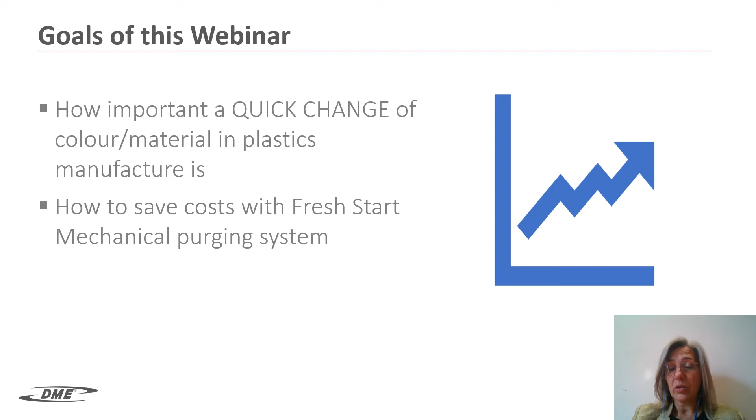The goal of this webinar is to understand how important a quick change of color or material is in plastics manufacturing, and how we can save cost while doing these changes, because we're going to do them quickly and efficiently.

First, let me introduce DME. DME belongs to Hillenbrand, which is a main company with a 2.9 billion turnover. Within Hillenbrand there are several companies focused on plastic processing: DME, Milacron, Mold-Masters, and Coperion.

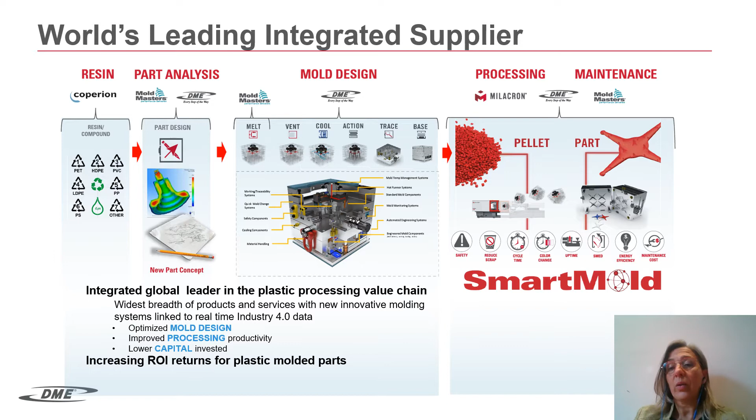DME's aim is to be your partner in the injection molding process from the very beginning to the very end - from part design and mold design to processing and mold and machine maintenance. We want to help you optimize mold design, improve your processing productivity, with the lowest possible investment.

So why is making quick changes in plastics material or color relevant for you? Some of the reasons are obvious - it's obvious that we want to increase the quality of our process.

Our goal is to grow the business and increase returns, but also if we are more efficient in doing the color or material change, we'll have happier employees - an employee will be happy if they can make a color change in 1 hour or 30 minutes instead of 8 hours.

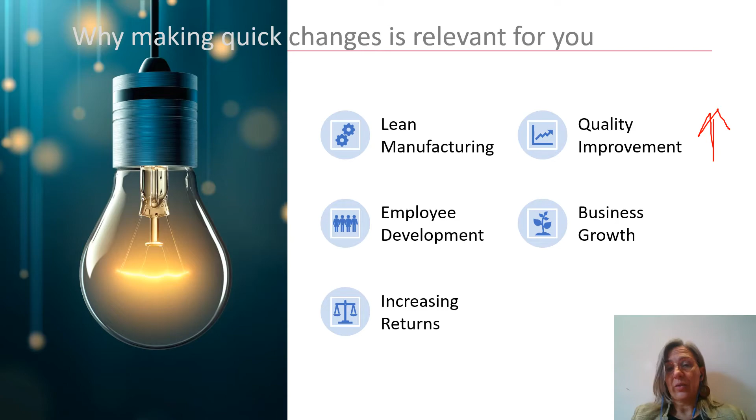Being more effective is also going to help us with initiatives such as lean manufacturing. Why am I mentioning lean manufacturing? Because at the end of the day, which is what a lot of companies are dealing with currently, the goal of lean manufacturing is to eliminate waste and minimize cost.

Also, lean manufacturing is a pull system - you only start new work when there is demand for it. What this means at the end of the day is that your customers are going to ask you for intensive color changes and intensive material changes, because you're going to change your molds very often. So you need a system which helps you do that effectively.

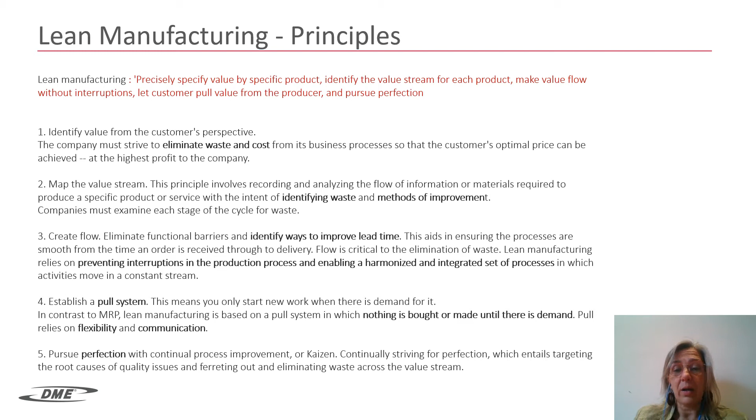Lean manufacturing is also about minimizing the scrap and waste - that's something we want to do. If we can do a color change in 20 minutes instead of 8 hours, this is obviously going to improve our profitability.

So how can we evaluate the suitability of a purge system? The first thing we need to think of is the parameters we need to take into account - which are the relevant metrics I need to consider to evaluate the purge system?

Is it only the material price? No, of course not. We need to take into account all these things - what is really my scrap rate currently?

How does that translate into material loss? What is the cost of reprocessing this scrap that I'm currently generating? How much extra labor does that imply? And what is the overall cost of it all?

So this is all we need to take into account - it's not only a couple of prices and that's it. We'll see a little bit more of that afterwards.

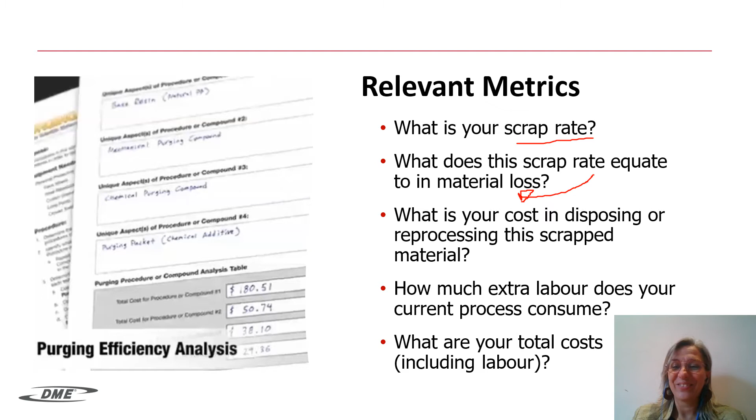Let's start with a very basic example. Let's consider that I do a changeover using virgin resin. This changeover is going to take 2 hours for me. The machine running cost per hour is 80 euros, so the machine downtime cost is going to be 160 euros.

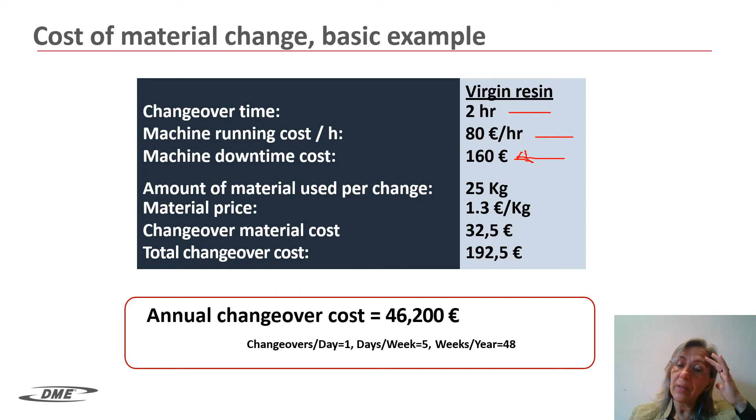I'm using 25 kilograms of virgin resin at a price of 1.3, so the total material cost I'm wasting here is 32.5 euros. The total cost of this changeover is 192 euros, which means I have an annual changeover cost of 46K. We need to keep that in mind, and we'll use it afterwards.

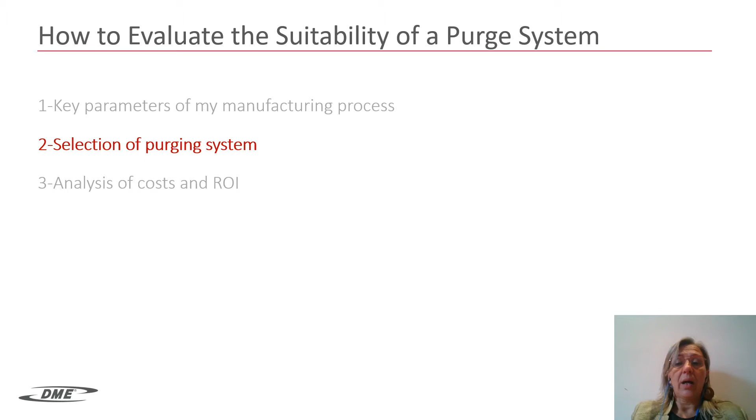So the next thing we want to do, now that we have an idea about the cost that it might imply in my company, the current purging system, we want to decide which purging system we want to go for. Some common situations I already faced is that when you talk to customers, they say, oh, I have a homemade purging compound, it's very cheap. I did it. Is it really cheaper?

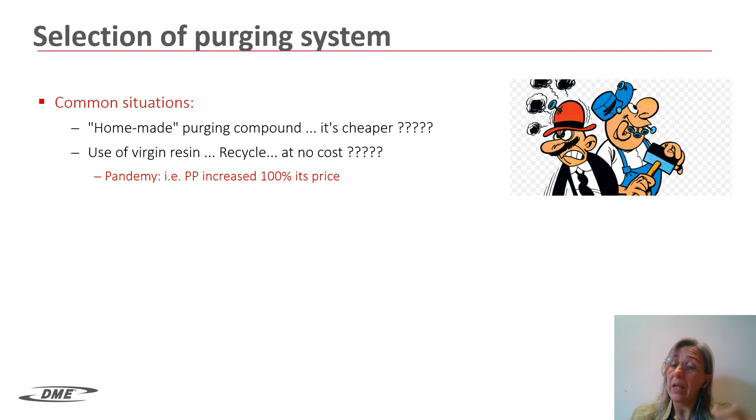I even had a customer who told me they were using corn because of the thermal expansion of the corn. Then some other people may say, no, I'm using virgin resin because afterwards I recycle it and purge with virgin resin. But there are some implications, right?

Are you considering the amount of hours you're currently using, the effectiveness of the transition, the contamination you're getting into the system? For example, if you use virgin resin, because at the end of the day afterwards you are going to recycle this resin. These are things you need to take into account when going for a homemade system.

So the challenge is really to understand your current cost of the internal solution and compare it to our proposal here.

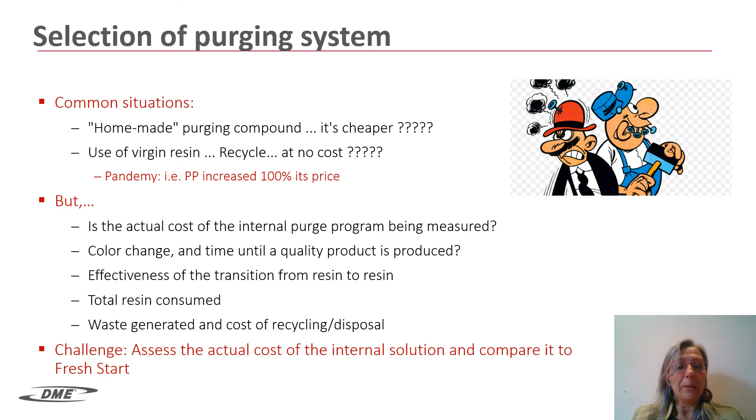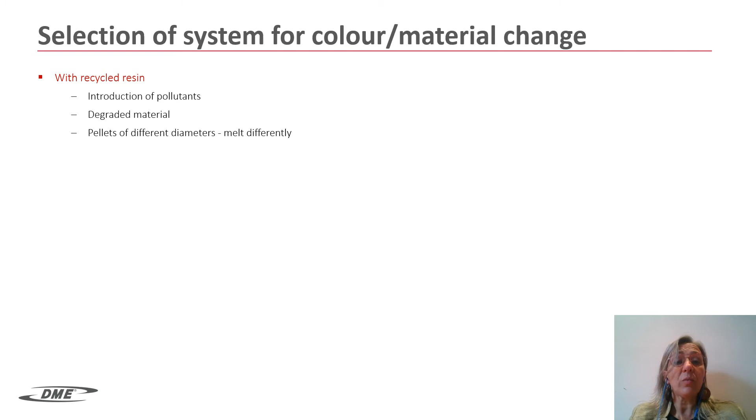Okay, so there are several systems for doing color or material changes. One is using recycled resin. Obviously, if we go for recycled resin, we are introducing pollutants and degraded material, and we have pellets of different diameters so they melt differently, and it takes a long time. The same with virgin resin, it takes a long time as well. So time here could be essential for both solutions.

And none of these materials is obviously designed to remove the sticky items that get in and are making our life difficult when we are purging.

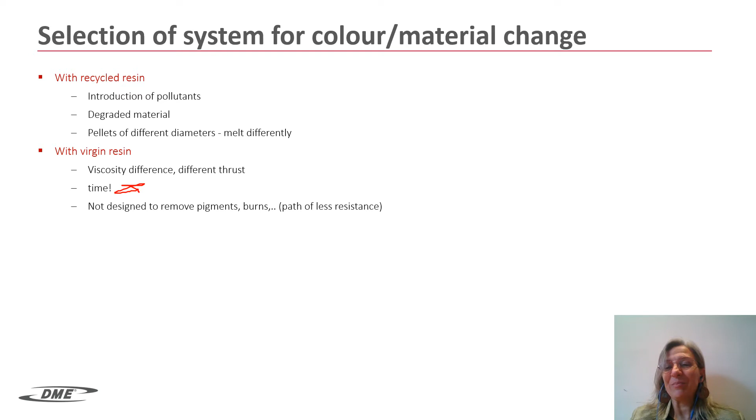So then there are several purging systems: mechanical, chemical, and hybrid. The mechanical purging systems usually add additives, basically it's a plastic with some additives on it, and they usually use more or less abrasive material. That's the first difference with our system, that we are not using abrasive material.

If we go for mechanical purging, there's no chemical reaction needed. The material just gets melted and it cleans, and it doesn't require some activation time, some soaking time. It cleans by shear tension between material and the surface, and this is really nice about that.

Another possibility is to go for chemical systems, and these systems do require activation time. Then there's a mixture of the two, and these are the hybrid systems. So these are the systems we can find, generally speaking.

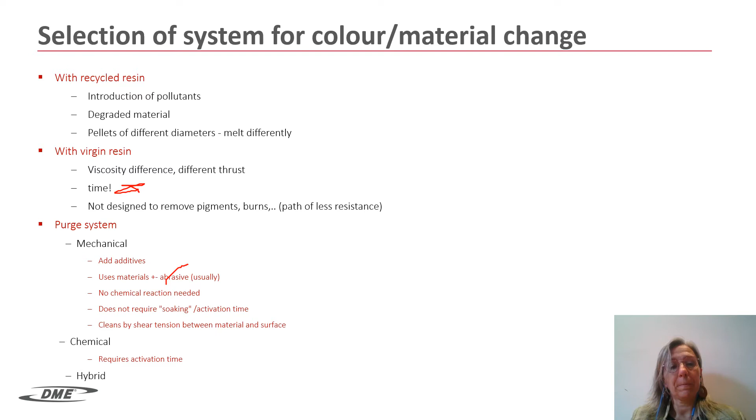So which are the critical areas of difficulty in cleaning? You have suffered that much more than I have, so you know this happens in the machine and in the mold, but it also really depends on the material. Reprocessed materials are more difficult to get rid of, and organic pigments are sometimes a pain to get rid of.

Where do these materials get stuck? Mainly in the barrel wall, in the flights of the screw, and at the very end of the machine.

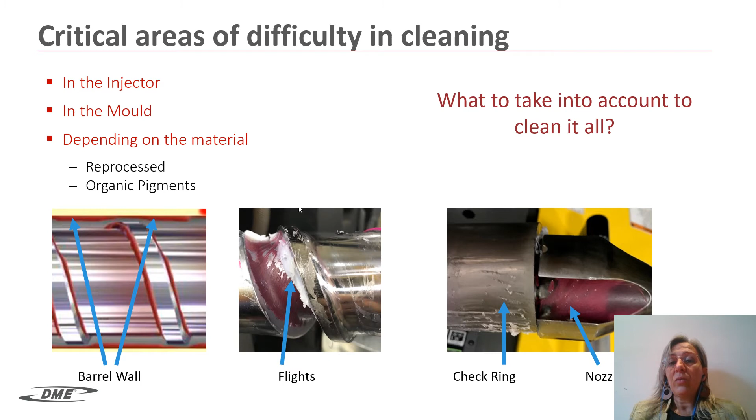What do I need to take into account to clean it all? The first thing we need to know is that the plastic tends to go to the path of least resistance. So it's easier for the molten plastic to flow here than there, because here there's friction with the wall, and here there's just more molten plastic.

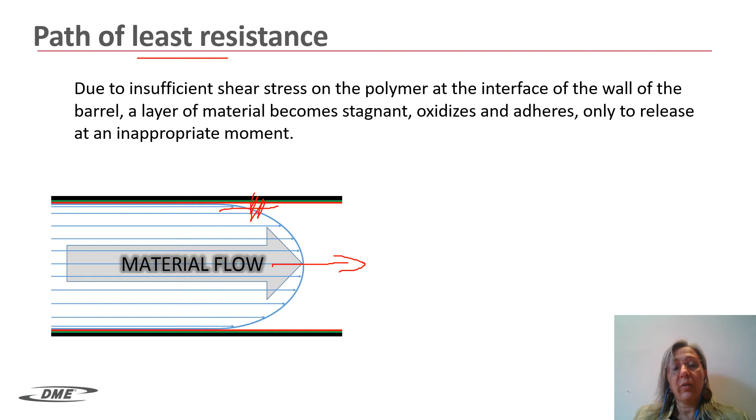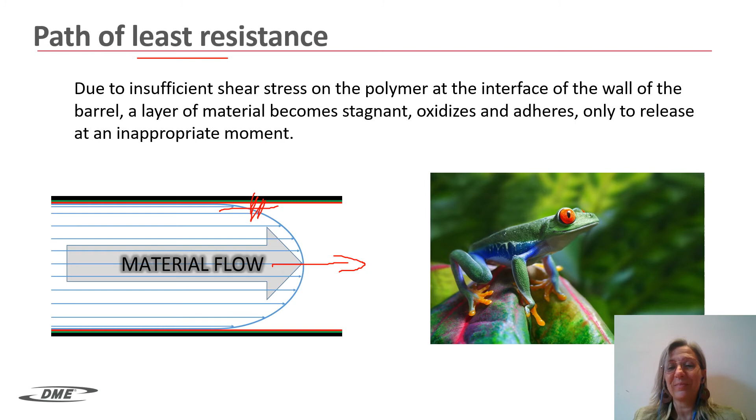Okay, so what we want to do is really to try to avoid laminar flow and try to get to turbulent flow. Why? Because in laminar flow, which is what we saw in the last slide, we would have zero speed here, and here we'll have the maximum speed. While with turbulent flow, we will have the same speed of all molecules all over. This is what we want to get.

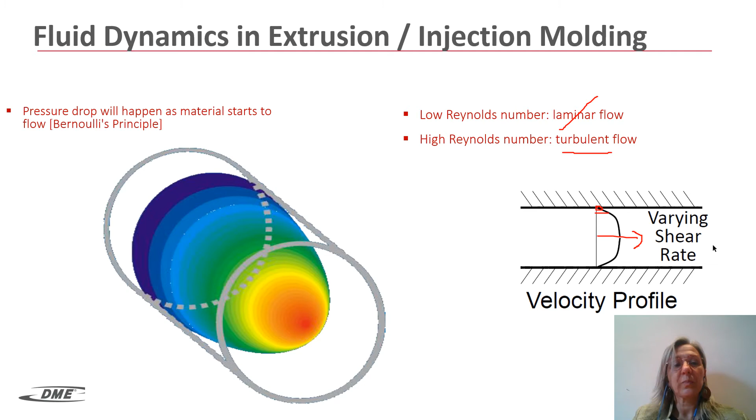If we have this turbulent flow, we will have shear rate, we will have friction between molecules all over the channel. And then this friction is going to peel off the contaminants, even in areas of slow flow.

So our system, the one that we are proposing now, which is called MC2, goes for a high Reynolds number. He's getting that with a process, but mainly because of the ingredients. So the goal is really to create a turbulent flow which is able to get into any hole as small as 254 microns, into any nook and cranny, to be able to get into areas of low flow. So this system is going to be able to remove the contamination in the screw, in the cylinders, but also in other areas such as hot runners.

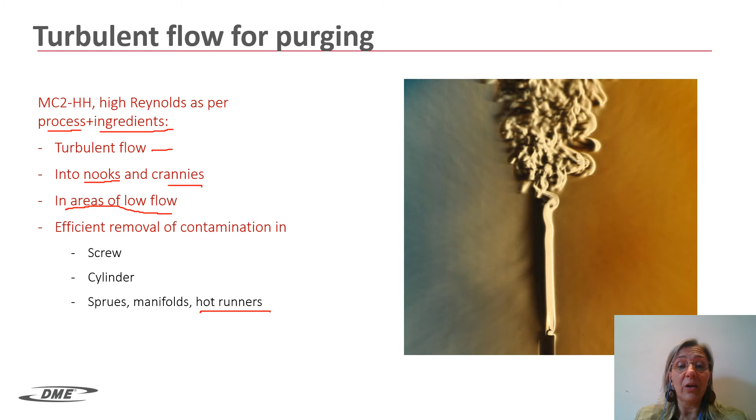For example, I want to mention here that our brother or sister company, Mold-Masters, already did several tests with this system in their hot runners, and it works nicely.

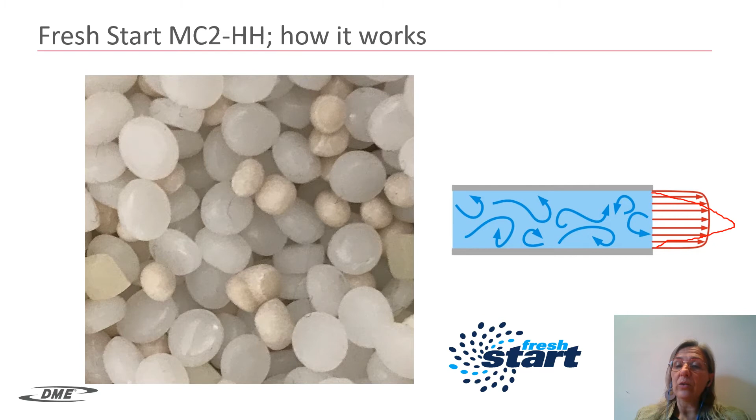So this is roughly how it works. This is the turbulent flow creating this shear stress, and this would be the speed of these molecules. You see, it's not like that anymore, right? Now it's kind of a rectangular profile. All the molecules are the same speed, and all chaos and friction between molecules all over. As you can see here, Fresh Start is a mixture of different components, to be able to promote this turbulent flow.

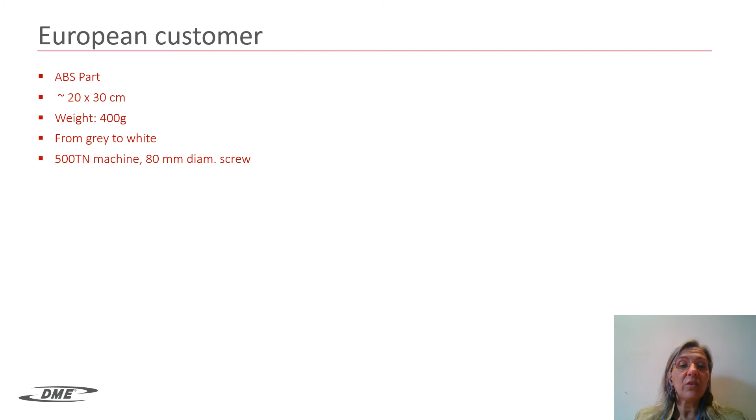So let me talk to you now about an example with a European customer who did one of the first trials here. This customer wanted to inject an ABS part, roughly 20 by 30 centimeters, 400 grams, and going from gray to white. These are the characteristics of the machine, and the process that we did with Fresh Start was...

what you see here. So you can see that the process is extremely easy. Basically first purging without purging material, to get rid of the ABS, then adding Fresh Start, and then purging again, okay? And then injecting. In this case, it was about 12 pieces, so that's 8 kilograms of material. And then adding new material into the mold. Total time for that, 35 minutes.

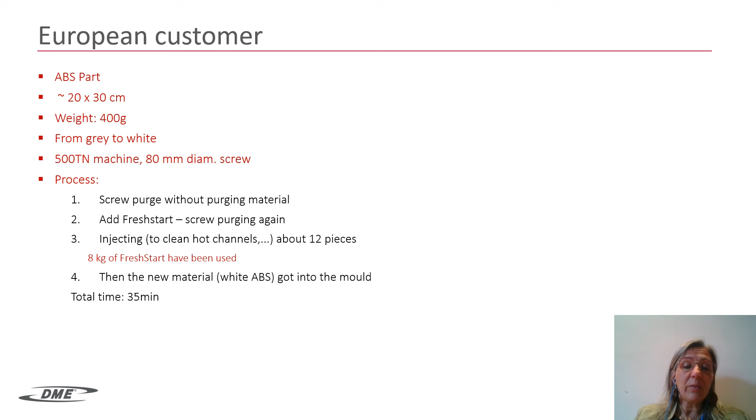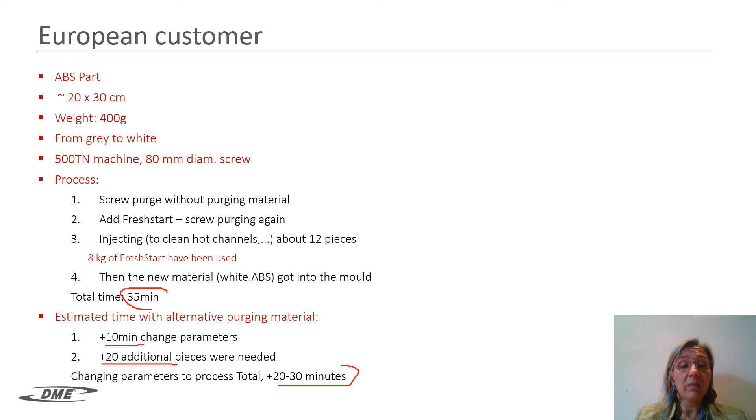Was this the first time this customer used a purging material? No, in fact this customer was already using an alternative purging material. But what happened was that with the alternative purging material, he had to change the temperature, meaning they had to add 10 additional minutes to the process. On top of that, the efficiency of the system was not that good, so he had to inject 20 additional pieces to get back to good production. So with the traditional purging material, it was adding 20 to 30 more minutes. If you take a look at that, that's roughly saving half of the time.

Another benefit that this customer mentioned while doing the trial is that he works with a lot of different materials. Currently he's using a purging material for polyolefins, another one for other materials, for technical materials, and another one only for hot runners. With Fresh Start, they can go for only one purging material for it all.

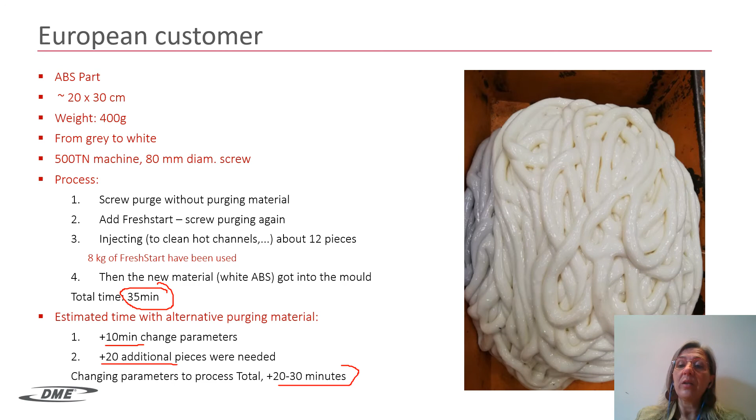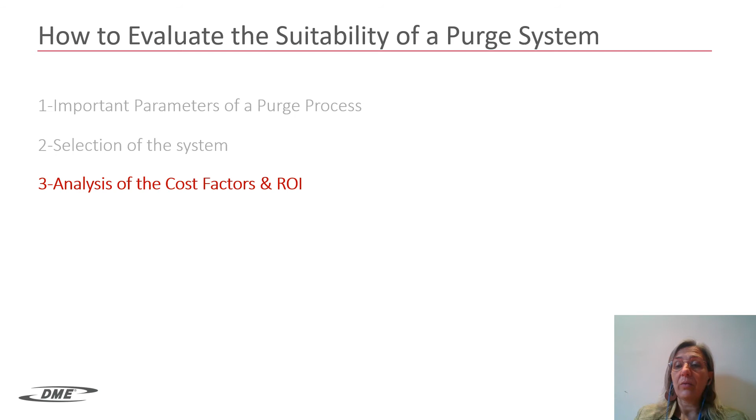You see more, this is the process. Okay, so that was just an example, and I'm going to now show you the cost factors and the return on investment in this basic example that we first saw at the very beginning.

In the example we saw at the very beginning, we had this cost. Remember I said you need to keep that in mind. If we go for FreshStart instead of purging with virgin resin, we go for 20 minutes instead of 2 hours. So the difference is mainly here. It means at the end of the day, even with the material cost being more expensive than the virgin resin, the saving is incredible here.

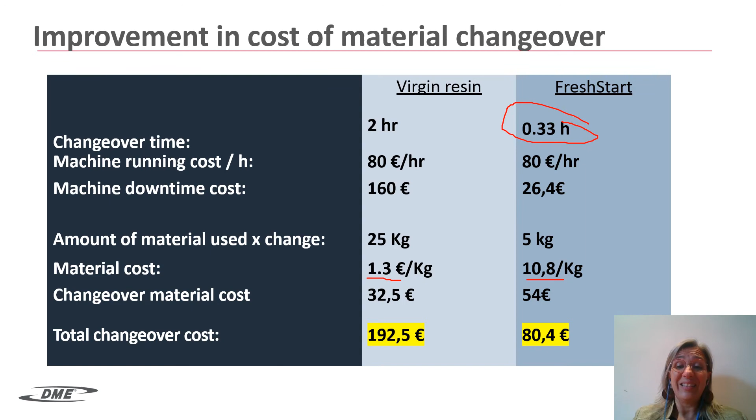So look at that. I mean, being extremely conservative, we are saving 58% of the changeover cost linked to this particular machine. And as I said, there are a lot of things that are not taken into consideration here, such as having different stocks of different purging materials, the labor, the scrap, reprocessing stuff, things like that.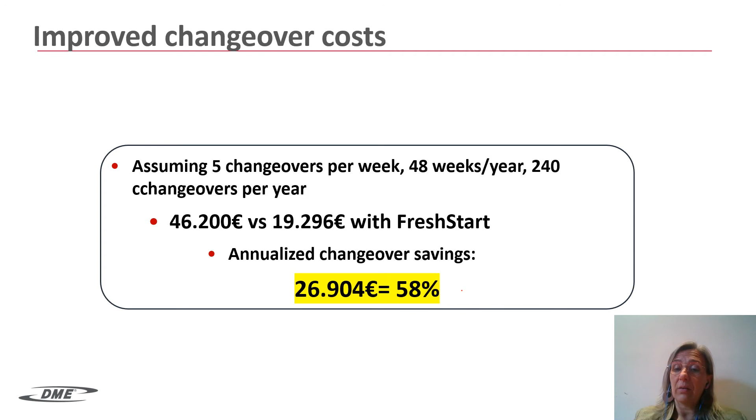So Fresh Start is the material, the solution that we are presenting here. As you can see, these are the main benefits: it works with resin type, all types of resin, temperature range from 177 to 329. It means that any plastic which fits in here is able to be purged with Fresh Start MC2. So that's fantastic, that really minimizes the stock of purging materials.

And something really interesting as well is that it can stay in the cylinder. If you want to seal the cylinder or seal the machine when you turn it off, so that you avoid, during the weekend or during vacation time, the material in the cylinder degrading or whatever, you can leave Fresh Start in there, no problem.

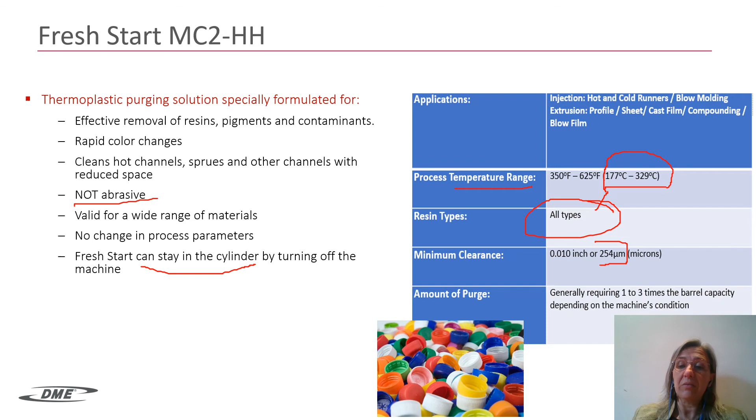Something really relevant as well is that it's made with safe ingredients according to FDA.

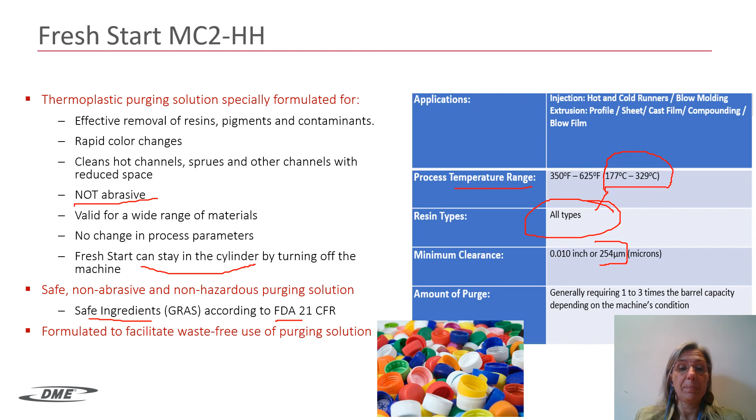So, applications - is it only valid for injection molding? No, it's valid obviously for injection molding, but also blow molding, extrusion. We had some interesting examples with extrusion lately. So it's really valid, you see it's mentioned here. It's valid for POM - not every purging material is valid for POM, Fresh Start is. So it's really one system for every purging application you might have.

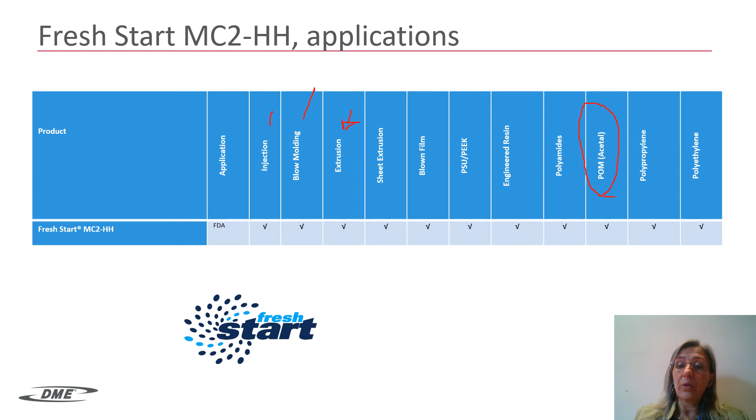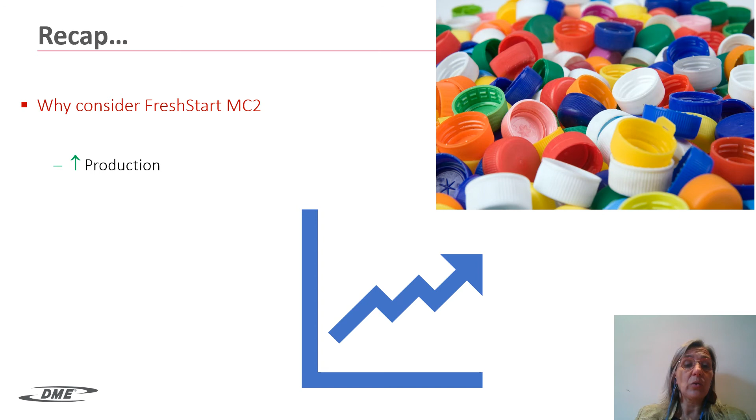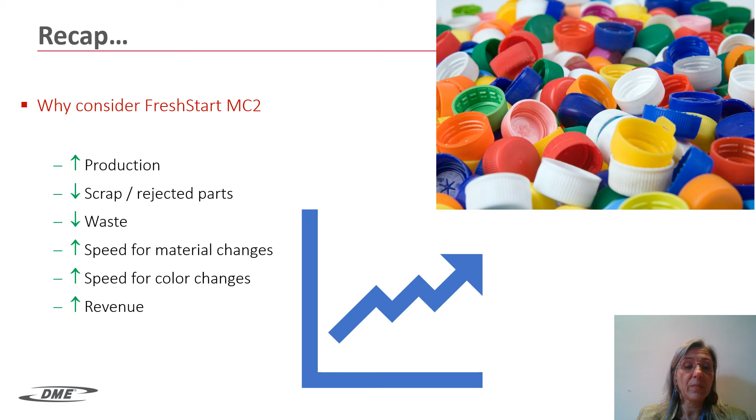So if we go for a quick recap, why should you consider Fresh Start Solution? Because it's going to help you increase your production, lower your scrap rate, and also decrease your waste. You are going to gain speed for material changes, which is always good, not only because of the savings that it means, but also because you want to keep your customer happy. And the same for color changes. And it's going to increase your revenue and profitability. So yeah, it would be good to consider Fresh Start because of all these reasons.

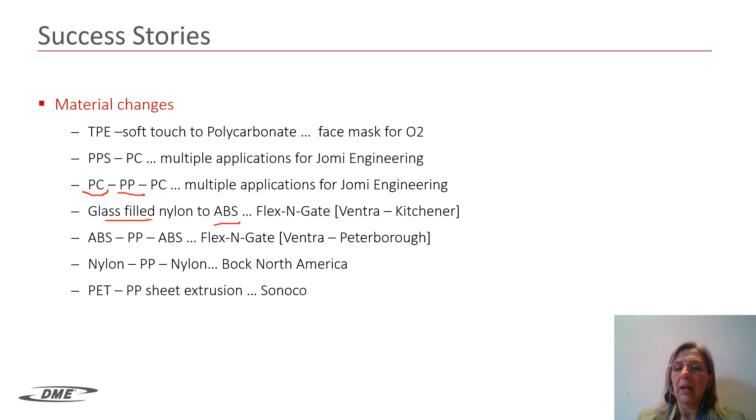These are some success stories that I would like to mention here, just for you to see that it goes, in this case, for example, from polycarbonate to polypropylene, or from polyamide to ABS. So we can really play with it, it's very flexible, it allows for different kinds of changes.

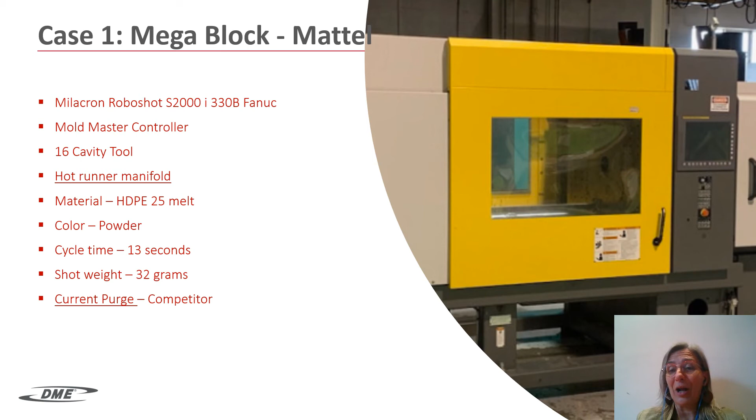And I just wanted to mention here a couple of examples, just to see real cases of return on investment. In this case, we have a 16 cavity tool with hot runner, okay, and they were using a competitor for purging - well, not anymore now, but they were using a competitor. With Fresh Start, we had this color change done in 20 minutes.

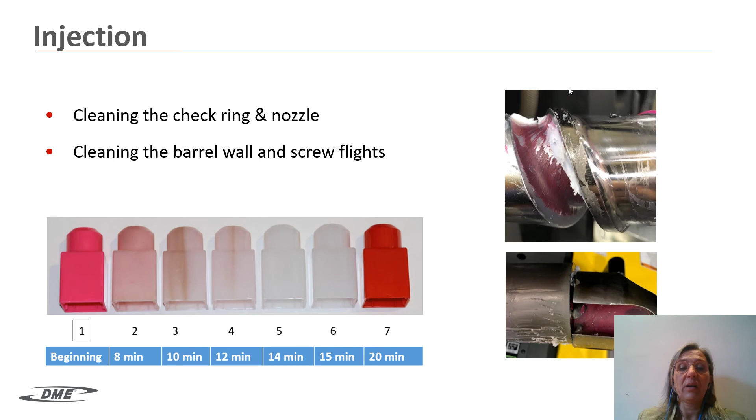As you can see here, the whole process takes 20 minutes. With the competitor's purging system, it was 90 minutes. This is the main difference.

So every day, considering one change per day, we were gaining 70 minutes per machine. That means at the end of the day, only by changing to Fresh Start, this company gained the equivalent of 2 additional injection molding machines. That's a lot of money, and not only a lot of money, but a lot of additional flexibility for your customers.

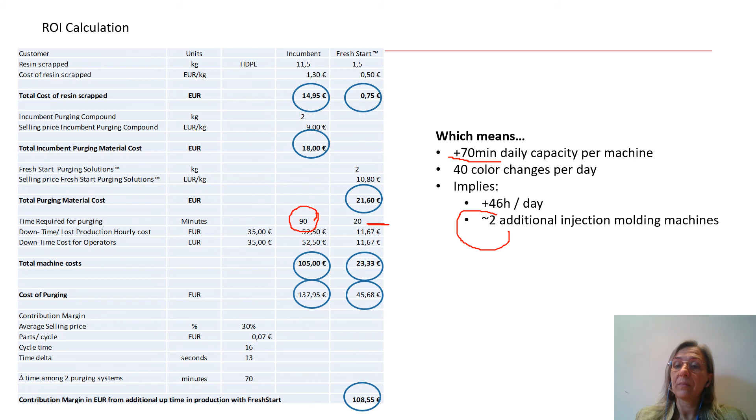This is another example here. In this case, the purging system was virgin material. So what they had to do going from black to white, this company ended up cleaning the screw manually, which meant 8 hours. So you can now imagine the benefits of using Fresh Start here. In this case, Fresh Start is used for hot runners, the cylinder, and the screw.

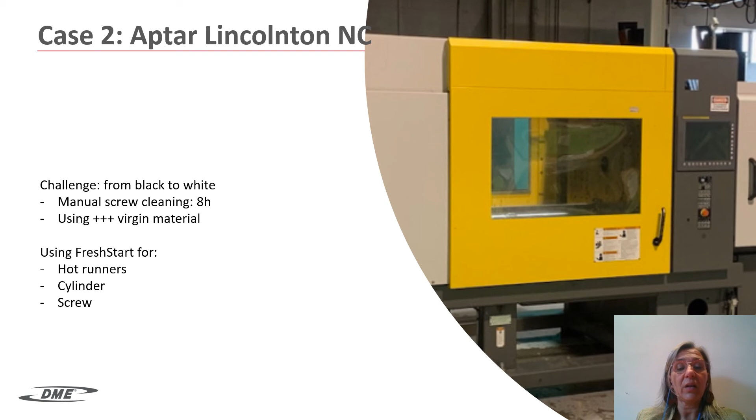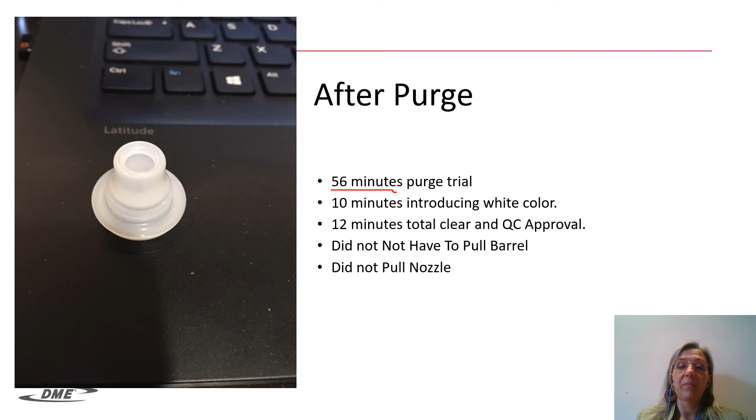So this is the process that we followed, and after the purge, the purge was 56 minutes in general. So what do we see here? The cost difference of purging is incredible. If you consider that these guys were using 8 hours to clean the screw manually, and then the hot runners.

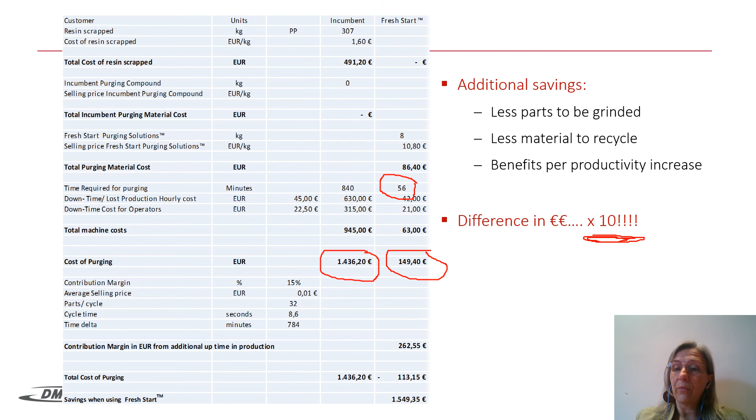Against less than 1 hour. So the savings is really 10 times the cost of the saving initially. It's incredible here. So if you're currently purging with either virgin or recycled resin, you really need to take into account going for Fresh Start.

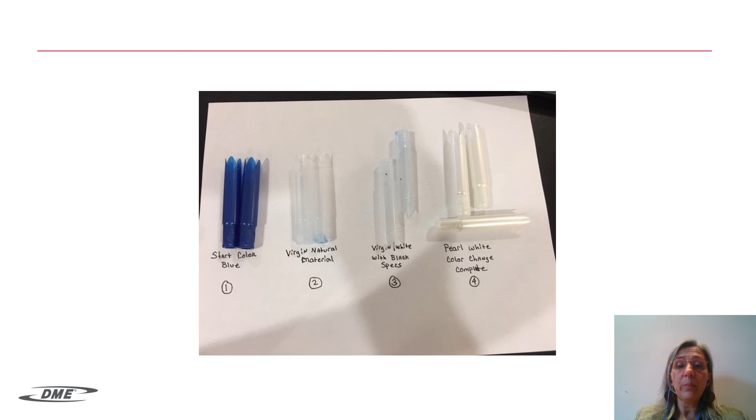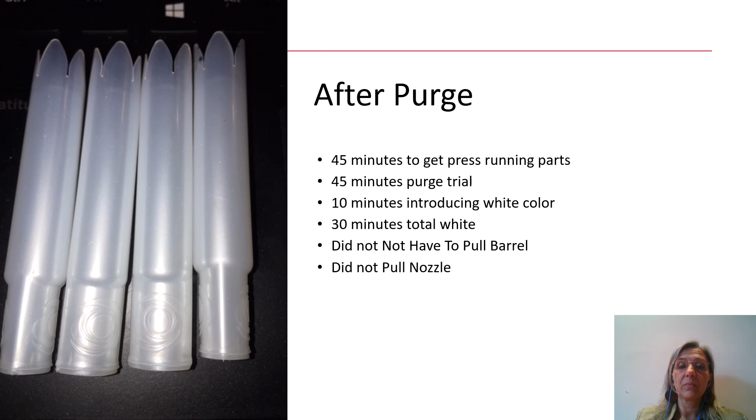This other example is kind of the same, so the savings are the same. I just wanted to show you this one because in this case you'll realize that the part is a tampon for women. That means we were purging using Fresh Start for such health products as this one. And you can see here again the difference in cost is incredible.

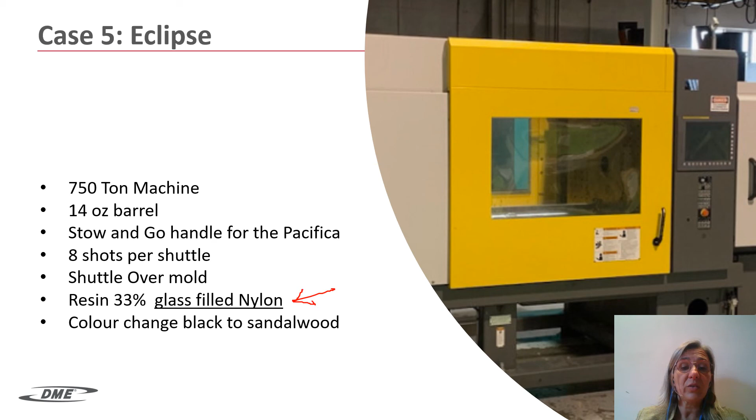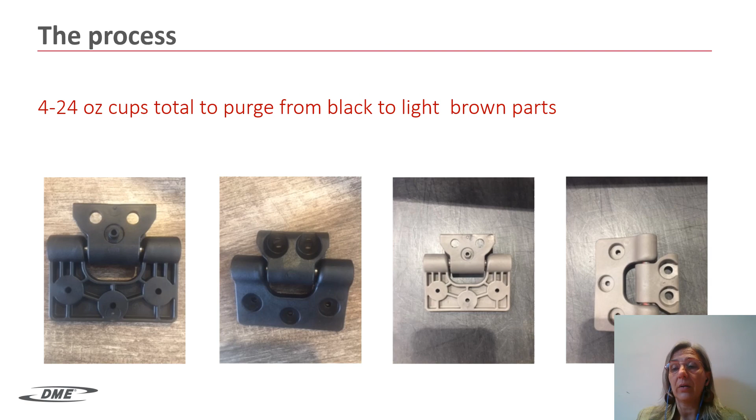This other example, the change was with a polyamide, glass filled polyamide, a part for a car, and it was from black to gray-brown. In this case, the difference was using another purging material, so the difference was really a gain in production time. Fresh Start was faster than the other system they were using up to now.

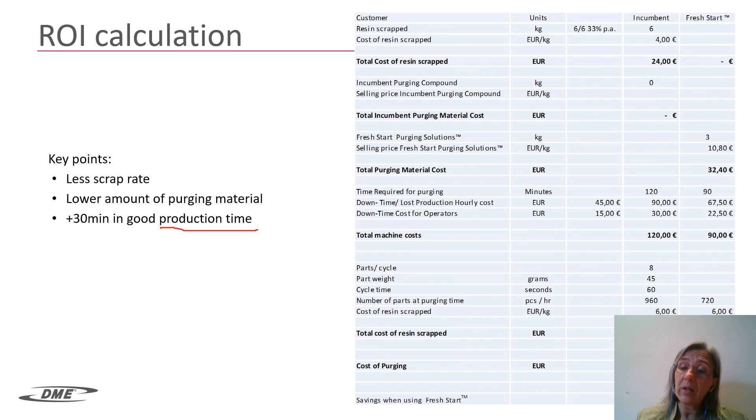Just for you to know, we do have this ROI Calculation Excel sheet in case you want to use it, in case you want to give it a thought. So these were some examples to help you better understand how useful this can be for you.

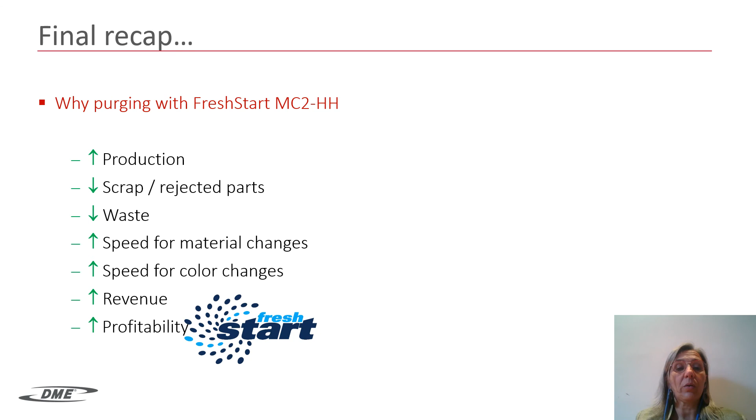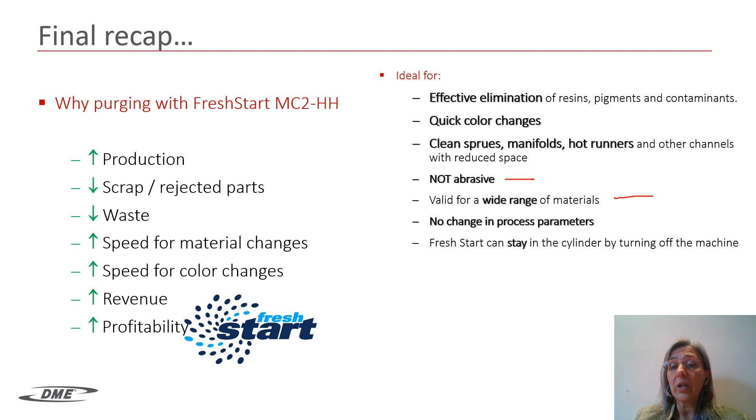In order to get all these benefits we are mentioning here, basically you want to speed up material and color changes and then improve your productivity. Remember that it's ideal for effective elimination of resins, pigments, and contaminants. Do the quick color changes. Remember that you can clean hot runners as well. Remember it's not abrasive, that's extremely important, and with only one product you will cover probably all your needs for purging. You don't need to change the temperature, so that means speeding up the process again and avoiding the possibility for operators to make mistakes. Remember that Fresh Start can stay in the cylinder, so you can seal the cylinder with Fresh Start, and it's made of non-hazardous materials.

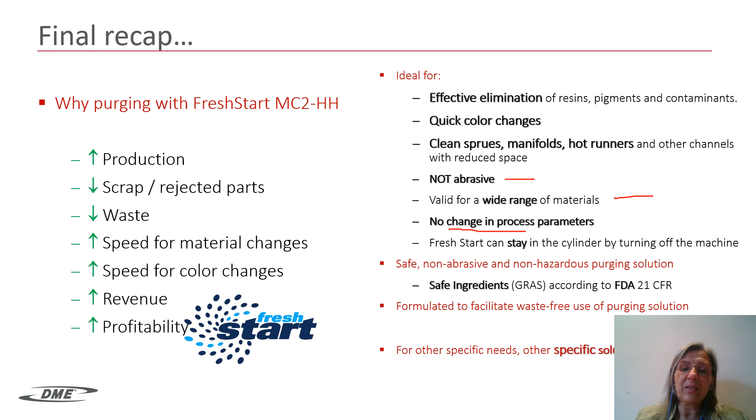For other specific needs that you might have, we do have other specific solutions.